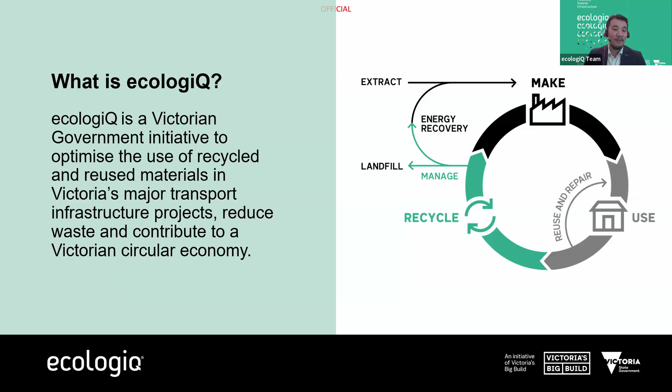Just very quickly, I assume if you found your way here, you know who ecologiQ are, but if not, it's a Victorian Government initiative to administer the Recycle First policy, which has been kicking around since 2020, in fact. And what it's all about is diverting not just waste from landfill, but actually utilizing our resources. And with the construction boom here in Victoria, as part of the road, rail, tunneling, and even health and new hospitals and all those other builds, we're seeing a big opportunity there to really look at our waste streams and use them as a resource and keep them out of landfill, keep them in use, recycle them, but use them at the highest order. And some of the businesses that will be presenting here today are going to be taking you through some of the innovative products that they've come up with by using this principle.

So the Recycle First policy, very quickly. So here in Victoria, if you're bidding or there's a road or rail or tunneling project that's being delivered by the state, they will have the Recycle First policy applied to that project. And what that means is that during procurement, they need to come up and demonstrate how they're going to use recycled materials as the highest priority and in the best possible way in terms of carbon and sustainability as well. So that's what we talk about when we say optimize use of recycled materials. And really importantly, we ask them to report on the material and the volumes and the quantities of materials used.

So I think from that we've seen quite a considerable impact. Apologies, I think it says 2.5 million tons of recycled materials there, but I actually think that's now sitting at 4.9 million, which, if I'm correct, might be 2 MCGs' worth, but don't quote me on that, of recycled materials being used by our state projects. There's over 3.4 million tons of material being committed through the plans and through the procurement process. And what we're seeing is a double-fold adoption of the use of recycled materials in transport construction by projects that have the Recycle First policy applied, which is just a step in the right direction when we talk about shifting the dial and moving towards that circular economy.

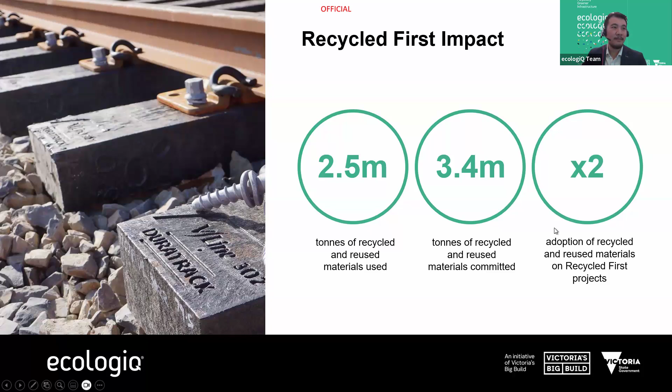I call it a bit of a handbook to demystify the procurement processes, some of the challenges that suppliers often face when it comes to bringing new products into the market in the sector, some of the standards and specifications and asset owners that you'll need to work through, how these projects are awarded. Because we get a lot of these questions from businesses saying, hey, we want to do business with these projects, how do we get involved? So this handbook is your first step.

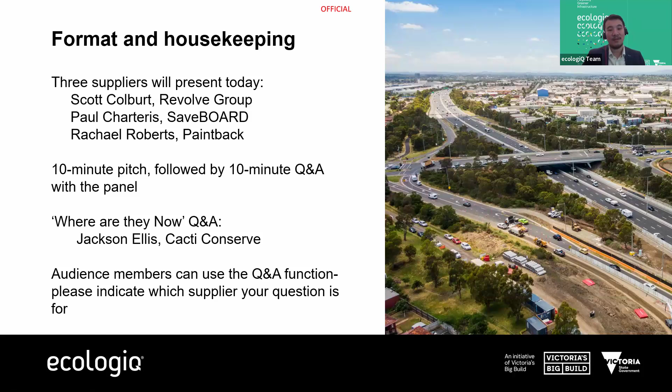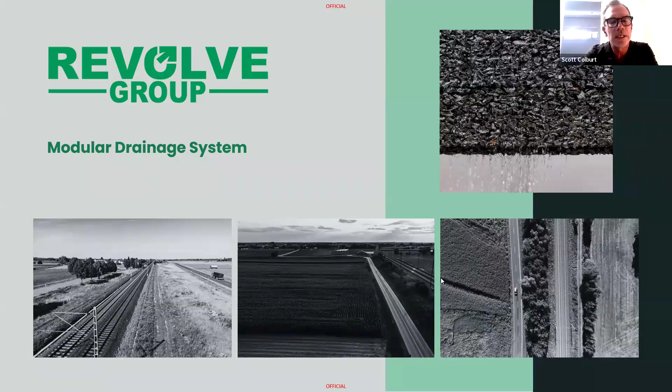Now, without further delay, Scott Colburt from Revolve Group. Over to you, Scott. You want to hop on and let me know when you want me to jump to the next slide. Hello. Thanks, Joy, and thanks for having us along today. Next slide, please, mate.

I'll just briefly give you an overview of Revolve Group. So our purpose is to really contribute to building sustainable infrastructure through providing low carbon sustainable solutions. So to give you a flavour, we've got a few products in the range. One's RapidRoot, which is a concrete-free driven pile system, no heavy plant, no concrete, high capacities for building bridges

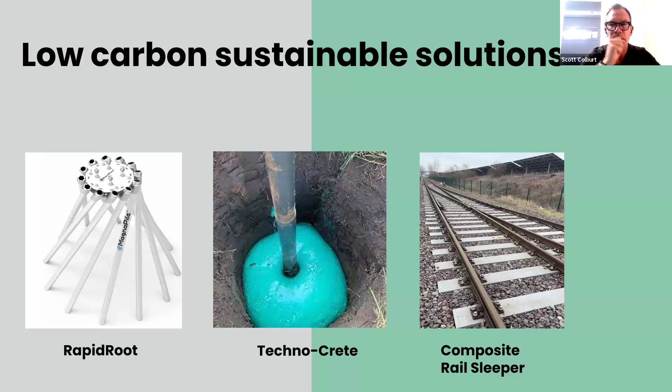and other assets. Techno-Crete, it's an alternative to post-mix and site-poured concrete made from recycled vegetable oils, rapid setting, high performance, high mechanical strength product for footings. And we have a composite railway sleeper used obviously in the rail environment, manufactured from recycled plastics. And our drainage system, MDS, modular drainage system.

So the MDS system really addresses a few things. One, it helps to combat climate change and extreme weather. It helps deal with end-of-life tyres, and it also helps provide more resilience of our infrastructure by way of increasing the capacity, and also providing longer term reliability of road and rail networks, and also optimising maintenance.

So what is it? It's a sustainable, tough and durable drainage solution. It's made from 100% recycled tyres, and it's encapsulated or bonded together with a polyurethane resin. As you can see, I'm holding a small sample here. It's really quite sturdy. Looks like a block of licorice, if you like. Now it's a very permeable structure that has really high mechanical attributes and compressive strength. Yeah, play the video.

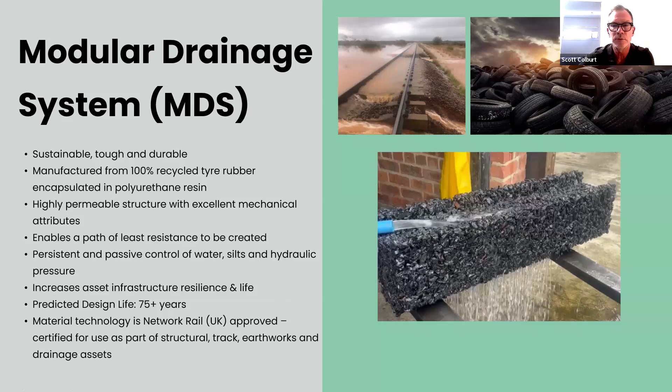And it helps deal with some of the issues that we have with conventional drainage systems, where pipes can be susceptible to clogging and deterioration. Sometimes they're unable to cope with moving the water away quick enough, and there's high maintenance costs. And the MDS drainage solution deals with all these particular issues. Next slide, please.

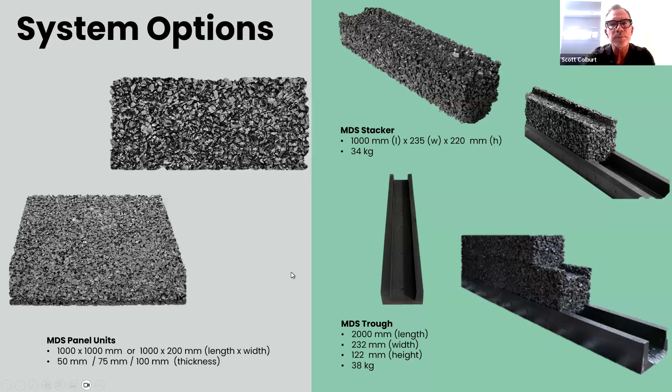Next slide, please, mate. Okay, so let's just talk about some of the applications. So in the main, it's for our rail and road surface and subsurface drainage. It's a great alternative to perforated pipe, filter stones and concrete channels, road and trackside, within the track environment itself and also the track bed. It can be used as an interface to link up with existing drainage systems.

It can be used to remediate failed drainage systems where you don't need to actually rip out and replace an existing drainage system. It can go in there and do the job of the failed drainage system. The silt control to attenuate and mitigate rising water, and also to deal with wet beds.

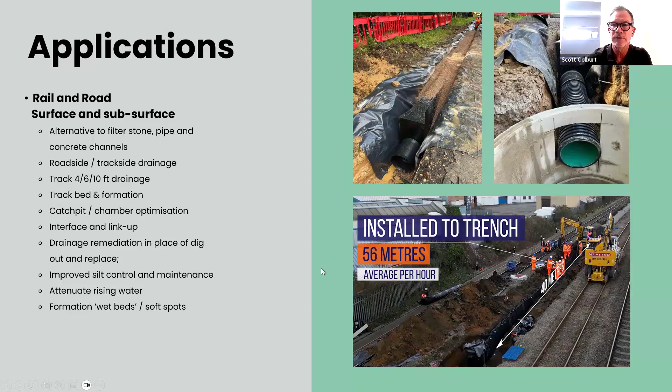In the images you see there, the one on the top, that's a road environment using the stacker and trough system. And the bottom image is a rail application showing the panel system where it's been installed sort of tip end next to each other along the side of the track. Next slide.

Also can be used around assets and structures. Examples of this are bridge abutments, retaining walls, around tunnels and portals. You can see a picture top left there where it's used on the back of a retaining wall. That's a legato brick there.

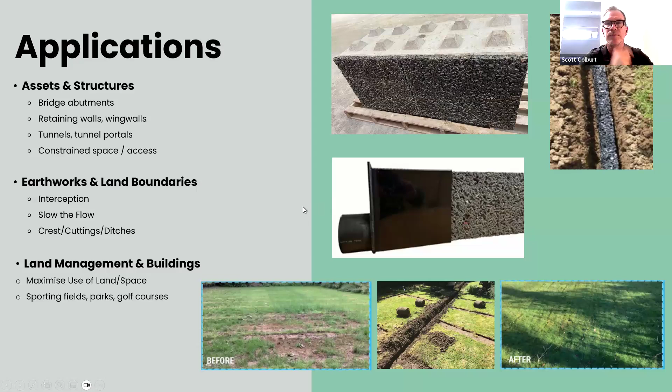Can be used in earthworks and land boundaries as interception drainage to slow down the flow of water, and also around the crest and cuttings and ditches, and also in land management to maximise the use of space, and also has been widely used in sporting fields and leisure and recreation. Moving along, Doi.

From a technical perspective, look, it's a tried, tested, proven product, and we have the data to substantiate the performance of the product. I'm not intending to go through this today, but probably a few key takeaways is that it's been engineered to maximise the water infiltration. So that product has 45% porosity. So that's the voids that create the water inflow.

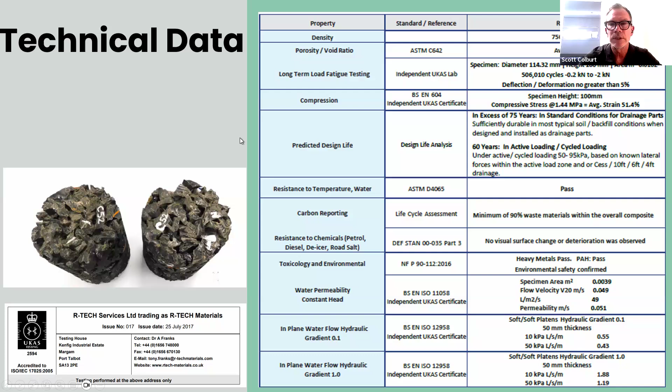The material provides long-term durability and resistance to the environmental elements and chemicals, performs well in high and low temperatures, UV resistant. From an environmental perspective, it's sound. There's no microplastics. It's engineered to withstand loading conditions in road and rail, and designed to accommodate minor movements in the ground. So all that data is there to support the performance of the product. Next slide, please.

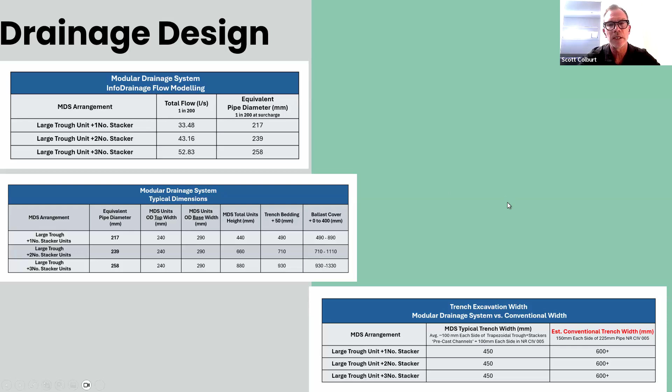Quickly, in relation to drainage design, probably the key point here, without looking at the table specifically, is that we have the ability to provide hydraulic modelling to support drainage engineers and do comparisons to filter drains and other pipe arrangements or conventional systems that are used, and provide guidance and comparisons against pipe diameters that may be used and water capacities, and from a constructability perspective, trench widths and depths that are required to suit the system.

The benefits of the system from an installation perspective: it's significantly quicker. From the excavation perspective, the widths are at least 25% narrower using standard buckets, and the depths are quite a bit shallower as well, as you can see in the table there. From a safety perspective, in doing the trench works and the construction, but also it reduces potential hazards posed by standing water and flooding.

Embodied carbon savings, so per kilometre of trenching required, we're saving at least 80 tonnes of filter stone or ballast that doesn't need to be excavated, disturbed and then replaced. And then there's the corresponding carbon saving that goes with that, just from optimising the trenches alone. There's no concrete, you're reducing your heavy plant that's required, and you're also reducing your logistics required. It's a lot lighter weight product to handle and use.

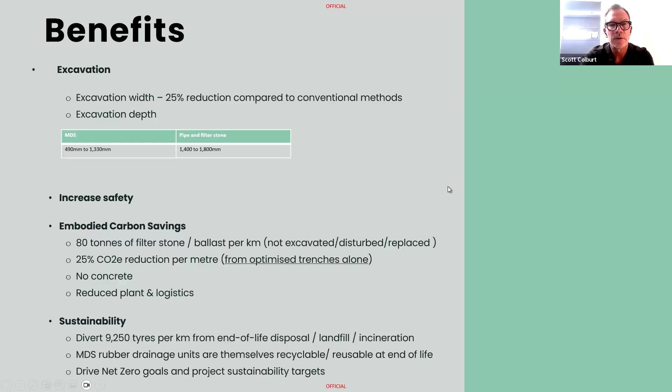From a sustainability perspective, every kilometre of MDS utilises 9,250 tyres that typically go into end-of-life disposal. The MDS itself is recyclable, so in essence it's a 100% circular product, and it'll help drive your sustainability goals and net zero targets.

Further benefits, it's a versatile and adaptable drainage solution that'll integrate efficiently into existing or new drainage networks, quick and easy to install with less disruption to track or road, and it'll increase your productivity from an installation perspective.

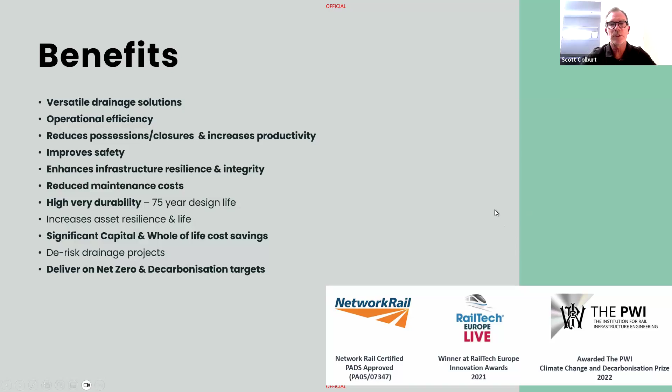From a maintenance perspective, the efficiency and durability reduces the frequency and scope of your maintenance and reduces your maintenance costs. Highly durable, design life 75 years, and this will increase asset resilience and your asset life. From a whole of life cost perspective, it's a more cost-effective alternative than conventional means, and there are some capital savings as well, and it'll help de-risk your drainage projects.

I'll just touch on two quick case studies, one in rail and one in road. Now, these are both in the UK. It's a UK product that's been developed there and been widely used in the UK, and approved and certified for use in the rail environment by Network Rail.

This project at Tuffley, back in 2019, was to provide an interface between the ballast shoulder and the 6-foot drainage system to open up the ballast and release the water away from the track, which was causing constant wet bed and flooding issues of the track. So our drainage system was used here, and we were able to install it without having to remove the failed drainage system.

The massive benefit from this particular project was the saving in time. The contractor that did the works forecast that using concrete pipe, it would have taken them 33 shifts for the 650 metres, and they were able to reduce it to 7 shifts, which they equated to a saving of around $2 million from an installation perspective.

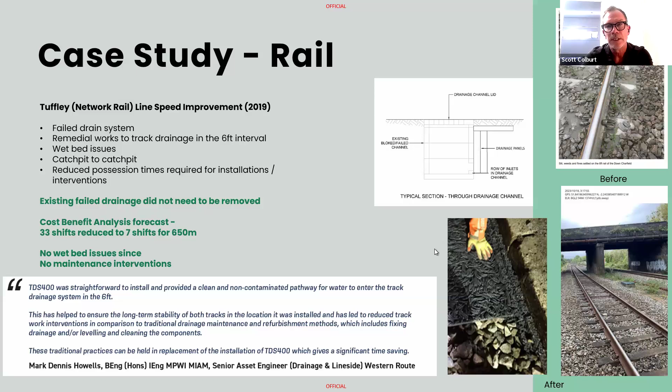Sorry, Scott, we're just about at time. Sure, I'll jump to the next case study.

This is a recent project done with the Highways Agency in the UK, really to test the product in some extreme conditions, a once in 1,000 year storm event where 11,000 litres of water was flooded in the space of about 20 minutes, and the product held up incredibly well, demonstrating the durability and resilience to mitigate those flood risks in that road environment.

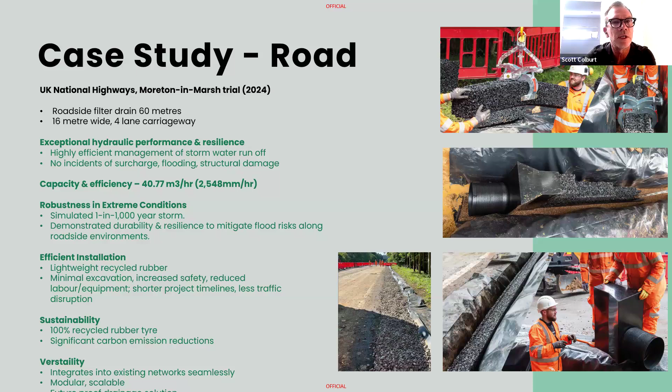So we might leave it at that. Yes, I want to give the panelists ample time to ask questions as well. I think Stephen, you first came up the rank. Yeah, look, so many questions, Scott. It looks very promising.

How can you prove it doesn't silt up and need flushing out? And also, how do you stop plant roots getting in there? Plants love to go where the water goes. Have you had any issues with vegetation ingress? Yeah, sure. From the silting up perspective, the polyurethane that's used to bond or encapsulate the product ensures that the silts don't clog in the voids in the structure.

And from the vegetation perspective, that's an interesting question. I don't believe we've had any issues with that in the past. We can use matting like you'd typically use to manage filtration when you're doing trenching works to help deal with that as well.

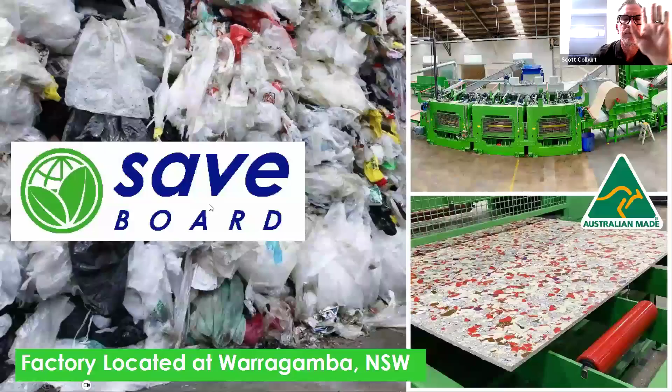Thanks for having me. For those who don't know, we are SaveBOARD. We're an Australian, New Zealand-owned company. I'm a Kiwi, but currently sitting in Sydney at our Warragamba facility. Next slide is probably easiest. Yeah, I know you have quite a few slides, Paul, so just let me know. Yeah, I'm going to go through them pretty quick.

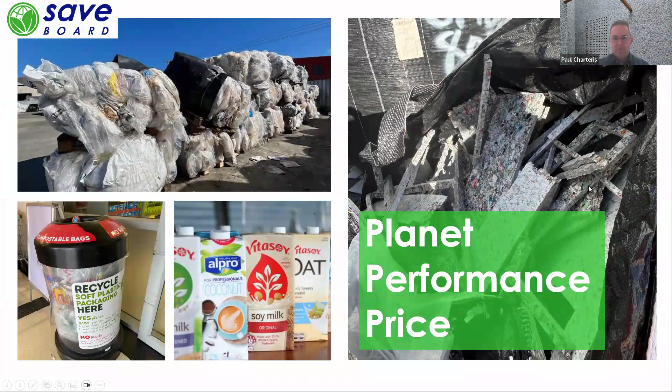So, look, our business is modelled on a circular economy, so we're all around planet, performance, and price. We know we have to be competitive in the marketplace. Next slide. And the key part of that is that we take end-of-life packaging from post-consumer and post-industrial. We make stuff, and we have a free take back scheme for all our end of life or offcuts.

Everything from hoardings to pop-ups. We did the FIFA museum at the World Cup last year. It's a key part of our business model and why clients use us. Next slide.

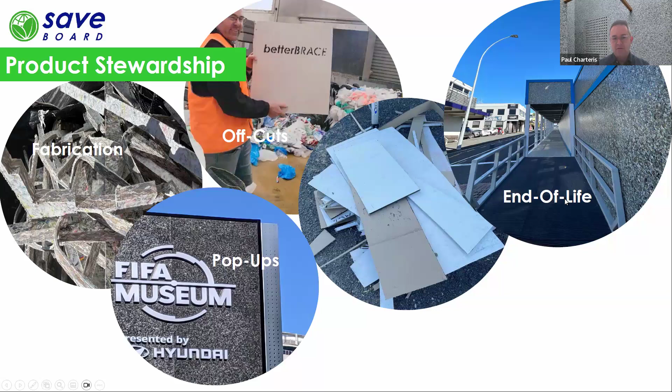One of the key parts of it, which we offer to our clients, is that we take their soft plastics. These are common construction soft plastics a lot of our clients accumulate. And as part of a circular solution, we take their soft plastics, they use our products, and it creates that loop that's essential to pull through demand of finished products. And we provide a tangible circular solution for them. So next slide.

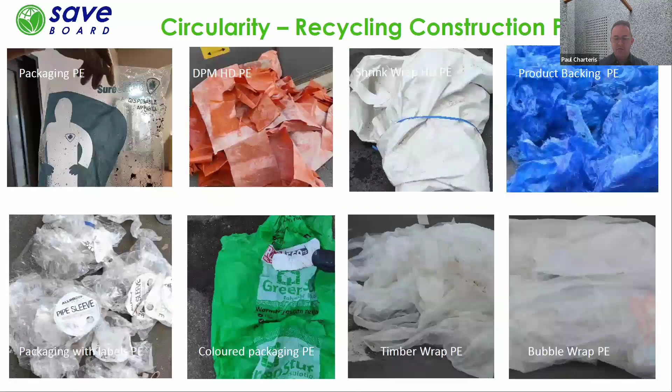So we've got about 7 products, and we almost cover the full spectrum, from an external bracing element. Sorry, going the wrong way. Apologies. So we have external bracing elements. So that's a sheet; a lot of common products might be plywood or OSB. We're doing a roofing substrate for warm roofs. We do 2 internal products, a paper face and exposed, and a ceiling tile, which is for commercial applications.

We have our multi-use product, which is a big seller in the construction industry: hoardings, protection, warehousing, industrial. And then we have a joinery grade product, which is focused on the kitchen, commercial, retail fit-out market. So next slide.

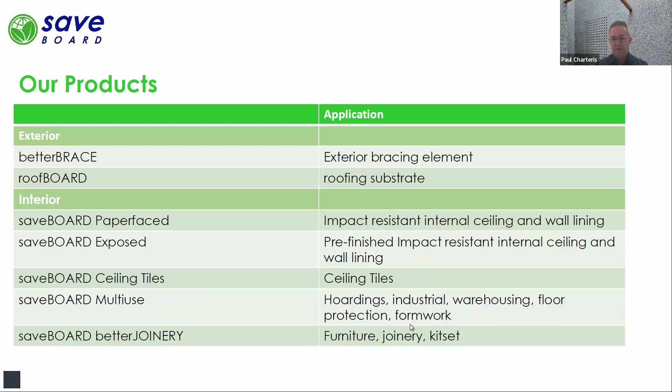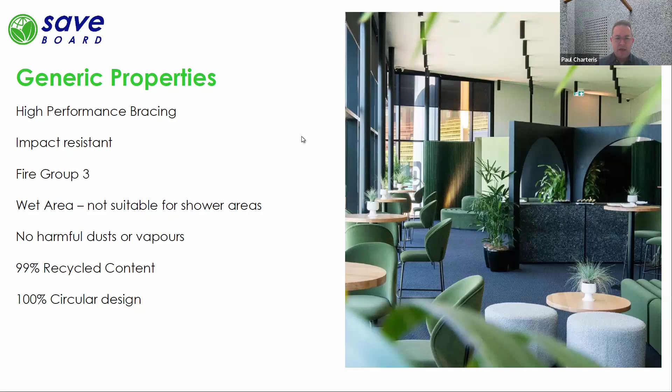So generic properties. This is actually in the AFL Gathering Lounge in Adelaide, I think. It's high performance bracing, impact resistance. It's fire group 3, which is the same as plywood, OSB and MDF. You can use it in some wet areas. It's made from recycled packaging waste, so there are no glues or adhesives; it's literally food grade or commercial grade plastics that go into it. 99% recycled content and 100% circular in design. Next slide.

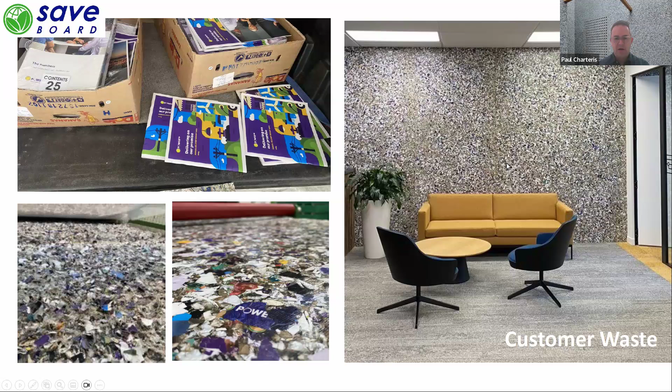And we also use customer waste. So this is where we do a lot of corporate clients where we actually use their waste packaging, from board reports to marketing materials, because ultimately our recipes are based on mixing the right amount of packaging fiber with soft plastics to make our board. So it's a composite board, not dissimilar to a particle or a strand board, but we're using recycled packaging material rather than wood fiber. So our wood fiber is the packaging fiber. Next slide.

Multi-use panels. That photo is the Lee Group on the Northeast Link in Victoria, so I think there's a couple of kilometers already up. This one's got an extra, more like about 4-year life, because it's got a UV coating both sides. The bottom left-hand photo is in Perth, in a big shopping centre there, so they're using it for retail temporary hoardings. The bottom right-hand corner is the same application inside. Next slide.

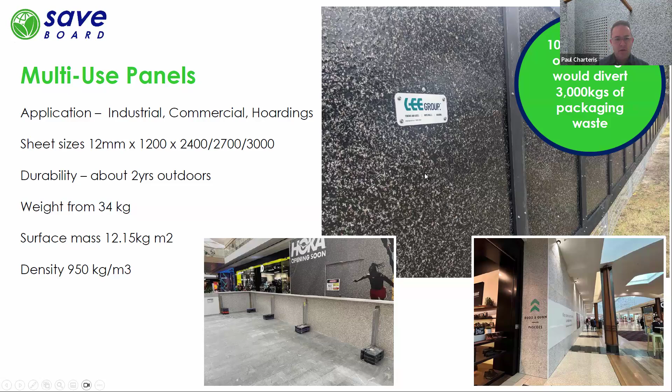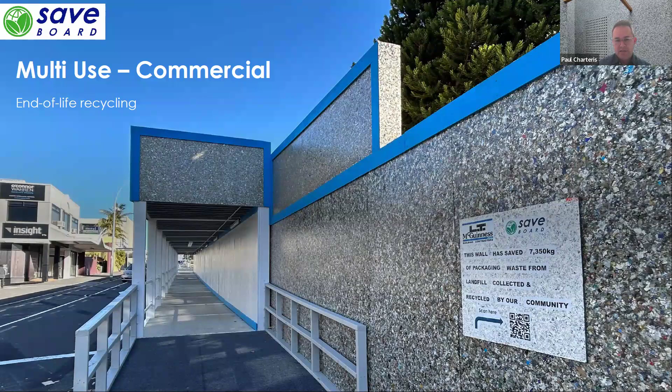This is in New Zealand. This is the same thing, more of a natural finish, where you can see the composition of all the packaging that's gone into it. A cool little sign telling you that there's 7,350 kgs of packaging waste collected by the community that's actually in those walls. That will be up for a couple of years and then taken back to us for reprocessing.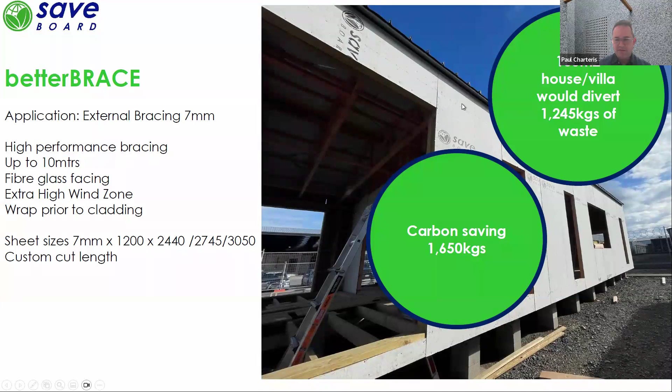Next slide. Better Brace, which we talked about. So this is external bracing, more residential and low-level commercial. It's rated to extra high wind zone. I think it's 6 kilonewton per meter bracing capacity.

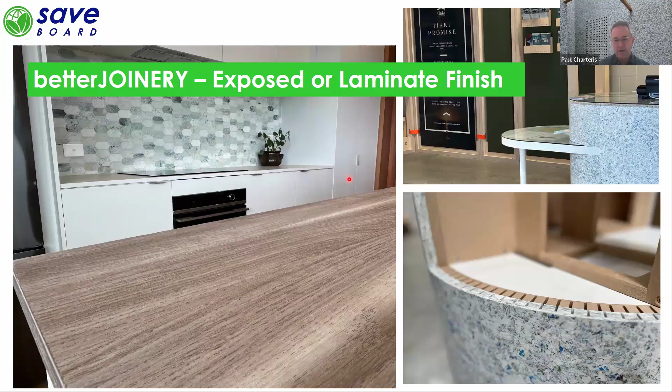Next slide. This is our commercial retail fit-out. So this is where you may not want the look. You want the benefits of SaveBOARD, the circularity, but you want it to look like a normal product with a high pressure laminate, or you can have more the exposed surface. So yeah, this is the only product in the market that's a fully circular joinery product. Everything else like MDF and particle board is basically ultimately landfill or waste to energy at end of life.

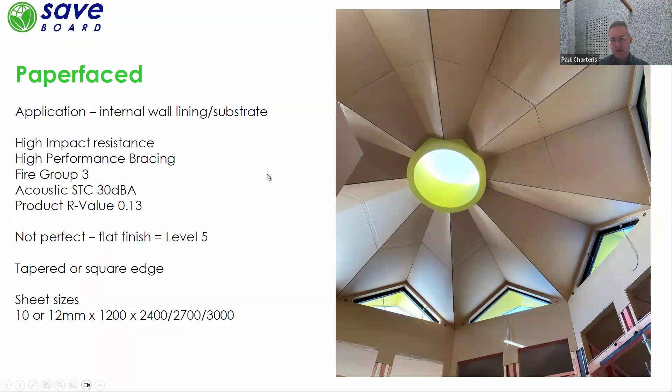Next slide. This is the closest we've got to a plasterboard. So it's got a paper facing with tapered edges. It performs really well, although it's not a perfect surface finish. It's not flat like plasterboard. It's sort of dimpled, what I call an orange peel effect. So if you want it perfectly flat, you have to do a level 5 skim coat. Otherwise, you just enjoy the texture of the product, don't plaster it and just paint it. Next slide.

Product certifications and eco labels. So all our products are GECA certified. We've got Declare, meaning that we've got no red list products in our board, so it can be used right up to Living Building Challenge, which is the peak of sustainable design. And we've got 5 EPDs that are due out in the next week, basically, and they're a great story. Next slide.

So carbon savings. These are our EPD numbers that'll be issued shortly. Including biogenic, they're all negative. And how do we get negative numbers? Because our product contains anywhere between 60% and 90% wood fiber from the packaging. And because it's a higher density, you get more carbon per square meter. So if you think of, say, an untreated plywood, it's about -7, and CLT timber is about a similar amount. So we can pack more carbon per square meter than traditional wood products.

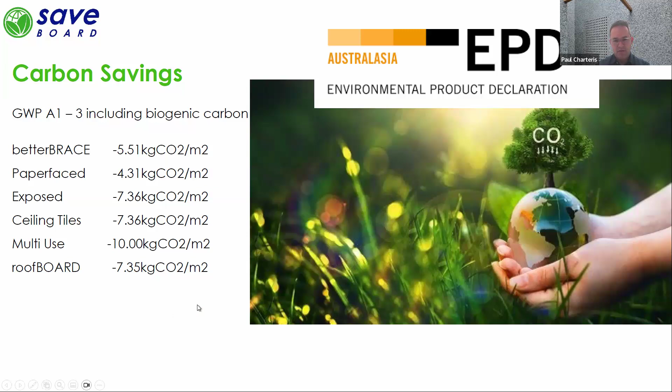Next page. Why SaveBOARD and what do we want? Look, the key to a circular economy is pull-through demand. So the more we sell, the more waste we divert, the greater the impact. We're not a startup. We're a real company. We've spent the money on certifications and compliance and testing. Our products are being used today, from the North East Link right through to the NGV, through to Woolworths. Every KFC in Australia will have SaveBOARD throughout their interiors.

We've even been awarded a $1 million grant by Sustainability Victoria to build a plant in Victoria. The key for us, so we aren't another REDcycle, is that we need more demand to underpin the new investments. So Victoria needs to increase their use of SaveBOARD. Otherwise, we'll have to not invest in Victoria and we won't be building a new plant. So we've got 5 months to make a decision.

We've got growing demand in Victoria, but not enough to actually underpin a new plant. So right now, we want Victorians to say, hey, we'll use your product, because then you can have your own plant in Victoria to solve your problems. And that's me. Thanks, Paul, for a very clear ask.

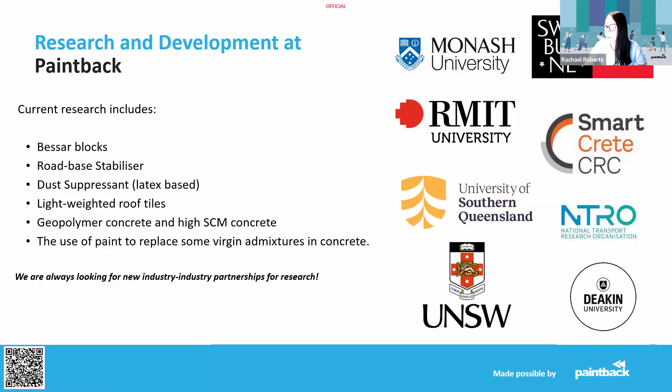So Paintback collects unwanted paint and packaging from 169 sites across Australia. This is typically your local transfer station, tip or resource recovery centre. Since the beginning of the scheme, we have collected almost 60 million kilograms. So that's actually quite a lot of paint and packaging that's come through.

Paint's quite an interesting material in that it's really difficult at the end of a trade project or a DIY project to actually use up that little 5 to 10% left remaining in the can. It's also really good material in terms of properties and quite flexible through a range of different applications.

We then treat and manufacture a range of products using the recycled feedstock at our Victorian plant, including grayscale paint, which I'll deep dive into a bit later, concrete additives, primer base ingredients, so trying to substitute some base formulations in primers with water-based paint, and also adhesives for outdoor applications. Paint's a very good sticky material to try and glue things together where required.

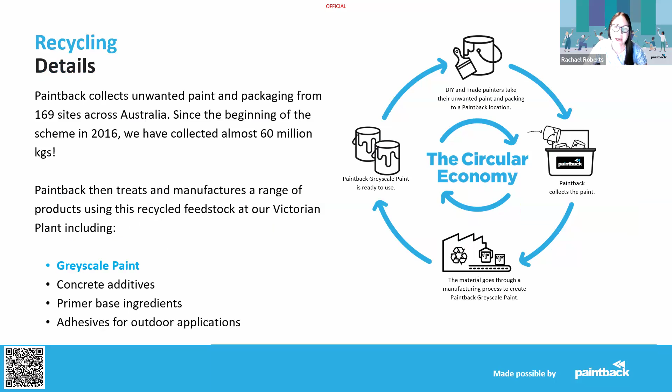The diagram on the right essentially details, oh, sorry, too fast. The journey. So we collect the paint at the transfer stations, we segregate and sort it by type. It then goes through a specialized manufacturing process to manufacture a myriad of products, but I'll focus on our Paintback grayscale paint for this presentation. And then it's essentially ready to use.

Next slide, please. It's really good for the environment, and we've actually been doing quite a number of active trials on different substrate surfaces and exposures. It's really good for covering unsightly graffiti. It's really good for coverage on concrete, steel and timber infrastructure.

It's great for adding a refresh coat and improving the local amenity. Great for quick coverage, so if you need to just cover a quick tag or an offensive picture, it's really good to quickly whip out and apply with a roller. And it's really great for covering difficult to reach places such as underpasses.

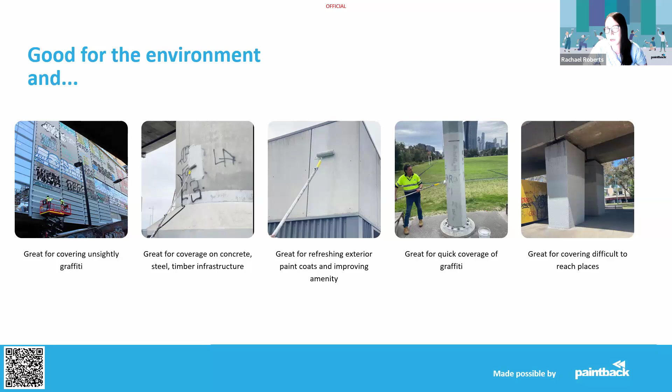Next slide, please. There's a stack of benefits, but it is circular. So we are using the paint that we collect through the scheme back into paint. So it doesn't get more circular than that. It essentially prevents it from ending up in landfill or other nefarious places like down the drain or down waterways. It's locally made, so we manufacture all the collected paint here in Victoria.

It goes on thick, so our trials have shown that where 2 to 3 coats may have been required with virgin paint, only a single coat is required. It dries quickly as well. It's competitively priced, so essentially it's pinned to the virgin price of paint, so we're not really attracting a recycled or sustainability premium to this product.

And there's a huge value to the community. It tells a really good narrative with community members contributing to local projects and covering graffiti and improving local amenity. It also has lower carbon emissions, so the reduction in virgin material use and local supply reduces embodied carbon. So approximately 1 litre of paint saves 0.15 kilograms of CO2 equivalent.

Early in November, we partnered with the City of Melbourne, who has a bit of a graffiti issue, and we thought our paint would help tackle that. So we've done a number of trials in conjunction with City of Melbourne's contractor, and more recently, we covered this large apartment building and car park located on Flinders Street in the CBD. This is quite a big building. It's a big job. And approximately 600 square meters was successfully covered quite swiftly.

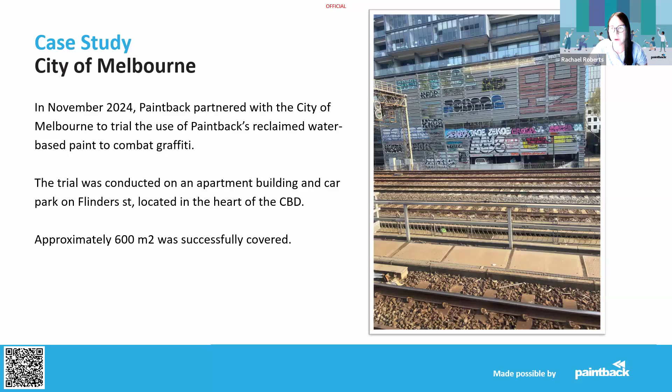Next slide, please. We covered all faces, so the front face, which can be seen between Southern Cross and Flinders Street Station, but also the sides. So here's some before, during and after pictures just to give you a bit of an idea of the scale. So scissor lifts were used, abseilers were required. It was by no means a small job and undertaking.

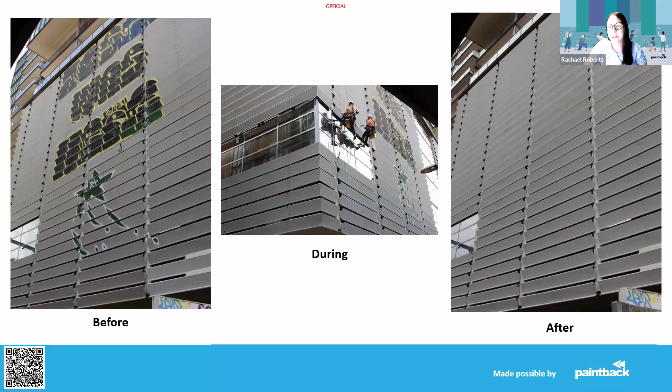Next slide, please, Doi. This was a very successful trial. It also highlighted that there's quite a few additional benefits. So in terms of this large apartment complex, to undertake this work, the car park needed to be blocked off to allow for plant, abseilers and scissor lifts. Essentially only 1 layer of our paint was required, and anecdotally 2 to 3 coats may have been required for a job like this using their virgin paint.

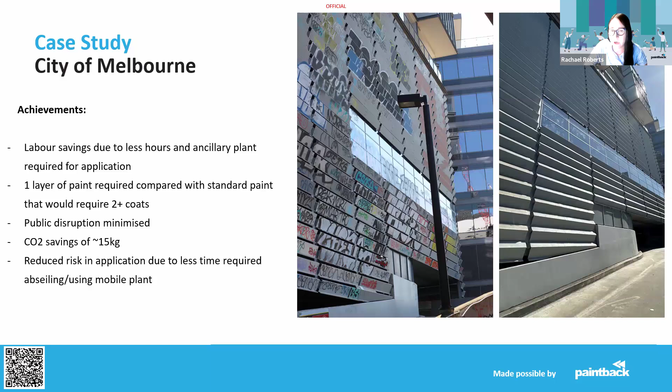So therefore public disruption was minimized. We were able to kind of fly in and fly out quite quickly, achieve really good coverage. And as you can see between the left and right photo, the color matching was great. You can't even tell that graffiti was over there in the first place. It also reduces the risk in application by minimizing the time for risky at-heights work and abseiling. Next slide, please, Doi.

So our Paintback grayscale paint is available now. We do have multiple options in terms of pack sizes, so from 10 litres up to 1,000 litres, depending on how large the job and project is. It can be used for interior and exterior applications. We've also performed extensive accelerated weather testing, so we can confirm that it adheres to all common substrates for a very long period of time and performs just as well, if not better, than virgin paint.

We're also quite fortunate to be able to tap into our member paint company's R&D. So this paint went through a similar study to a new formulation, and they confirmed that it performs really well. It can be applied with a brush and a roller, and essentially it's really easy to apply thick.

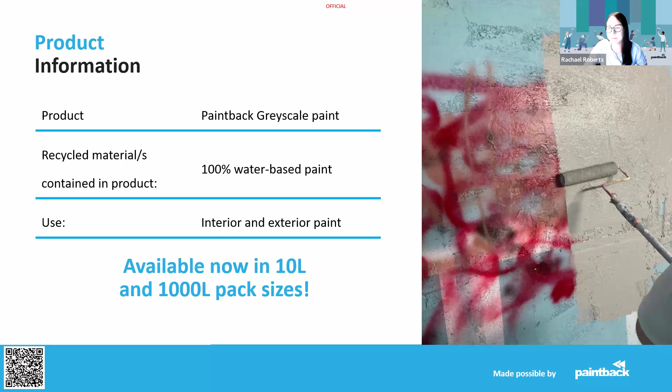Next slide, please. I just wanted to take some time to highlight some upcoming projects and products. So we're also working very closely with the SmartCrete CRC and Swinburne University to use paint as an additive in concrete. This has multiple pronged benefits. So it reduces the cementitious material required and therefore the embodied carbon. Concrete's one of the most used materials by projects and people. So essentially it just follows water in terms of material use.

It also has some quite interesting early performance aspects. So corrosion resistance is something that water-based paint really benefits in concrete, and durability and flexural strength. Next slide, please.

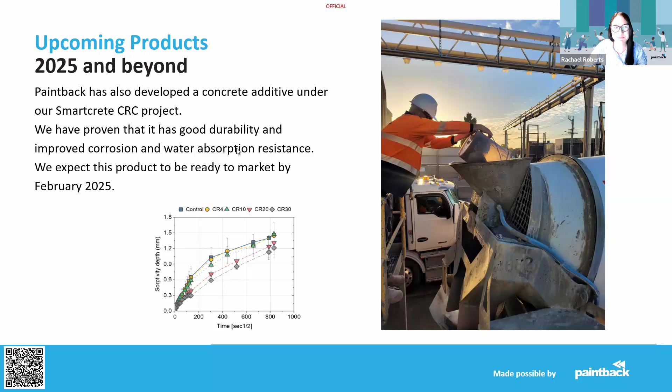So given the promising lab trial results, we believe that our concrete additive could improve concrete applications in the following: sewage infrastructure and pipes, footpaths and slabs, marine concrete because it does exhibit quite high corrosion resistance, and high SCM concrete. So it is my understanding that the concrete industry is trying to shift into using a high percentage of supplementary cementitious materials to lower the embodied carbon.

Unfortunately, that presents its own challenges such as pumpability, the rheology of the material, and strength formation. But what we've discovered is our paint actually really helps counteract those negative aspects of SCM. We're working with committed industry partners at the moment to validate the above applications. However, we're always interested in hearing from interested industry partners for wider use.